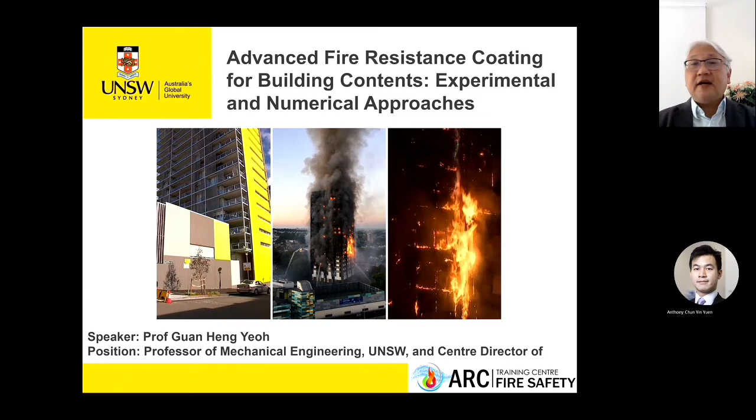My name is Professor Guan Heng Yeoh. I'm a professor of mechanical engineering at University of New South Wales, and I'm also the center director for the ARC Training Centre for Fire Safety. Today's presentation is to look at some of the work that we carry out in our training center, which is focused on developing advanced fire resistance coating for building contents.

Strictly speaking, we'll cover two main areas in this presentation: the development of a lightweight fire resistant coating, compared to some of the existing coatings that are around, and also some developments using advanced numerical approaches to characterize polymer degradation and chemical decompositions. Firstly, the development of lightweight fire resistant coating was actually inspired by work I carried out with my colleague, Dr. Anthony Yuen, where we were asked by Fire Rescue New South Wales firefighters to look at a case of an aged care facility fire, which resulted in 14 fatalities.

The reason why I mentioned casualties in the first place is because initially they were still alive when this incident happened, but a week after that, because of the toxic inhalation, they eventually passed away, which was a very sad occasion during the time.

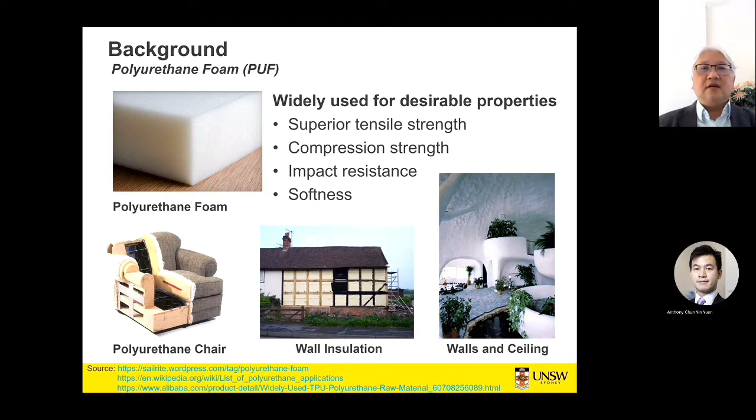So polyurethane foam is widely used in a lot of building settings, and it's typically found in all our houses. Why is it used? It's because there are a lot of desirable properties like superior tensile strength, compression strength, impact resistance, and also the softness that comes along with the material. As you can see, it is typically the material in chairs, wall insulation, and even walls and ceilings as well. But polyurethane foam has a lot of issues.

Basically, it's highly flammable, and it ignites at a very low temperature. You're talking about roughly between 180 degrees to 200 degrees here, it will ignite. So the risk is that if you have sufficient amounts of these materials present in your homes or office spaces, and if one of these materials burns, you could cause a rapid fire spread.

And because of the rapid fire spread, it could actually result in a lot of gases being emitted in the form of carbon monoxide. And we do know as well that polyurethane does emit hydrogen cyanide in some quantities as well. So the issue here is whether we can flame-proof this material, and one way to go about it is actually to introduce flame retardants into polyurethane foam.

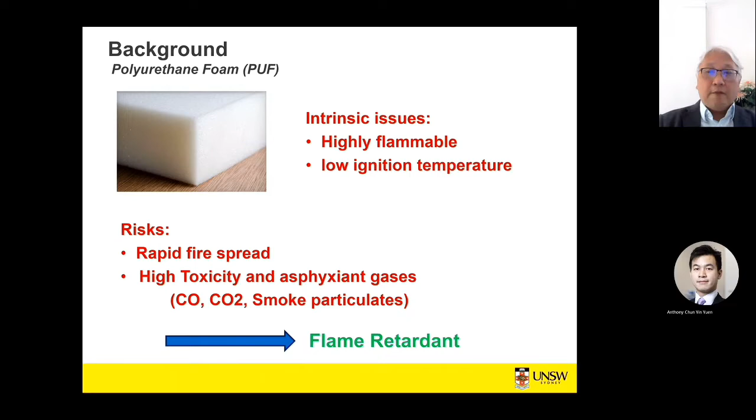And one of the benchmark fire tests to actually assess this flammability is the cone calorimeter. And I'll be revisiting the cone calorimeter a lot because it is a very suitable test to look at the time to ignition. You can actually assess the heat release rate, the total heat release rate, the smoke release, and even the gas releases as well.

And basically, we follow the Australian standard AS/NZS 3837 for testing heat and smoke release from materials. And we also assess a lot of our development, which is the coating of the foams, using the cone calorimeter. So let us look at some of the ways that people have tried to flame-proof polyurethanes.

So one of the ways is infusing phosphorus-containing polyol, a chemical compound which is very rich in phosphorus, into the polymer matrix. Some of the materials that have been infused with the polyol through the transesterification process are listed in the slide here. So the question beckons: how is the performance with the introduction of this phosphorus-containing polyol?

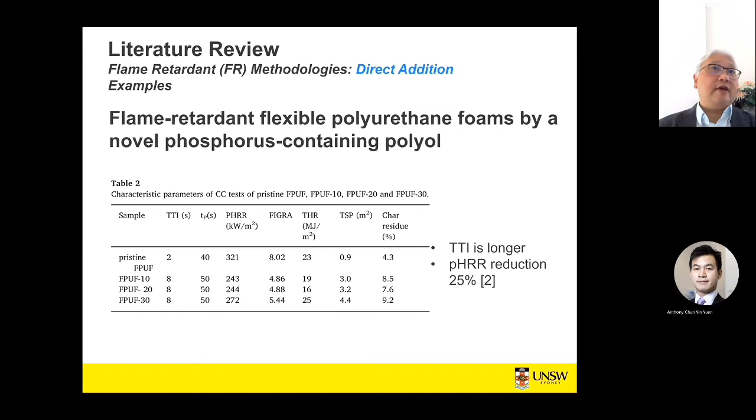As you can see, without the polyol itself, the peak heat release rate is 321. But with the addition of more and more phosphorus-containing polyol, the heat release rate reduces quite marginally to 243, 244, and 272. So you can see that in the peak heat release rate there's a 25% reduction, which gives us an indication that the introduction of phosphorus-based flame retardant could be a very effective way to flame-proof polyurethane.

There are others, introduction of other types of phosphorus-containing polyol like DOPO, which is very common, and it does give at least a 20% reduction in the peak heat release rate. Nevertheless, the fire safety performance remains not very significant, because with a 20% reduction the material will still burst into flames, and it's just a matter of retarding and not suppressing the flame spread that could happen.

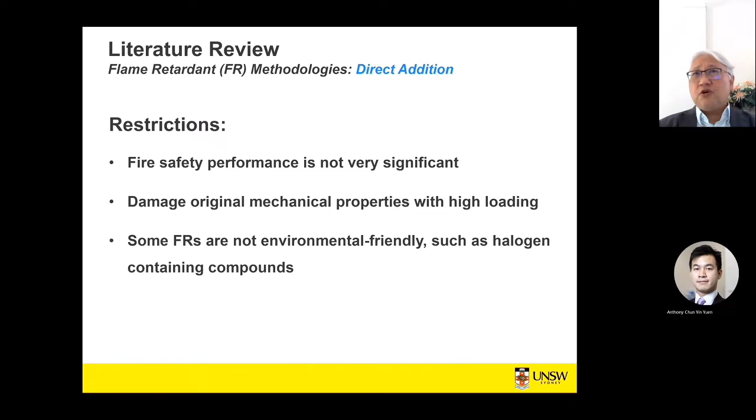And also, by infusing some of these flame retardants in the polymer matrix, the original content of the material is actually reduced. To give you an example, in a pristine polyurethane foam you have 100% of this material. If you take out 20% and replace it with 20% of the flame retardant, a lot of the mechanical properties are actually lost. And this is demonstrated by some of the testing that we have carried out. Also, some of these flame retardants being introduced are not environmentally friendly. For example, they contain a lot of halogen or even bromide-containing compounds as well.

So the question here is, could we introduce flame retardant with minimal influence on the polyurethane? The answer is, yes, we can. For example, we could take the original foam itself and apply a coating. And the coating can be realized either by spray, spin, sputtering, or chemical vapor deposition.

Another common approach that is also being introduced is the layering approach, which is called layer-by-layer assembly. So we basically try to apply multiple layers of different concentrations of flame retardants onto the polymer surface. So effectively, when we look at how we can carry out this layer-by-layer assembly, what happens here is that the original material or the substrate is polycation. So basically what we try to do is to activate the surface of the polymer so that it can attract the flame retardant compounds onto the surface.

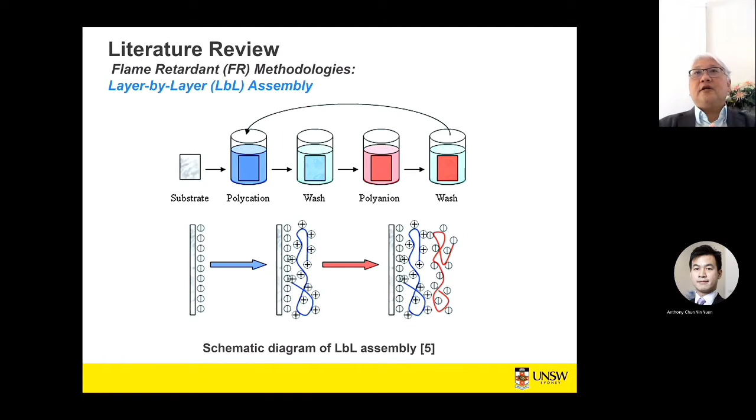And basically what is done here is that by introducing, for example, a negative ion onto the surface, you can now attract a lot of positive ions, flame retardants, and subsequently you can attract the negative ion, which all will be attracted to each other to form a very, very durable layer. So that's basically the whole principle of a layer-by-layer assembly.

It can also reduce the peak heat release rate and smoke release rate, but the disadvantage at the end is the significant weight gain due to this material. So a weight gain of 5, 7, or even 10% will incur significant additional weight to the polymer. So there is still quite a number of research gaps looking at flame resistant performances of fully organic flame retardants. The weight gain by incorporating these coatings is still a considerable factor.

There are still limited studies reporting the suppression of toxic gases such as carbon monoxide or even hydrogen cyanide, as I've alluded to in the beginning of my presentation. And the cone calorimetry experiment cannot represent the full burning of the material in a full room environment, for example, the flashover phenomena in a nursing home.

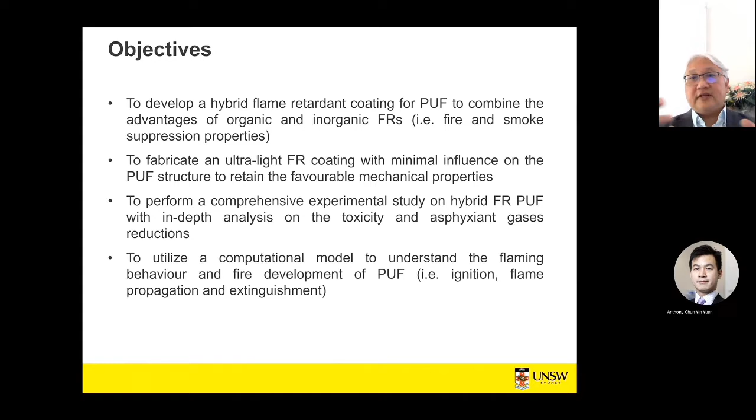So the material that we have discovered lately that could actually produce a lightweight fire resistant is MXene. So what is MXene? MXene is a new family of 2D transition metal carbides. It's always produced by the exfoliation of the MAX phase. The beauty of this material is that it has a thickness of around 1 to 2 nanometers, and it's a 2D sheet of roughly a couple of nanometers in size.

And what we have found is that MXene has a very superior fire retardant performance, and it also has other functionalities like good thermal and electrical conductance as well. So it's really a multifunctional material. And as we looked at what other organic compounds can be complementary to MXene, we found that we can use chitosan, which is basically an extract from prawn shell, and also other nano compounds, for example VMT, which is vermiculite, or even MMT, montmorillonite, as well.

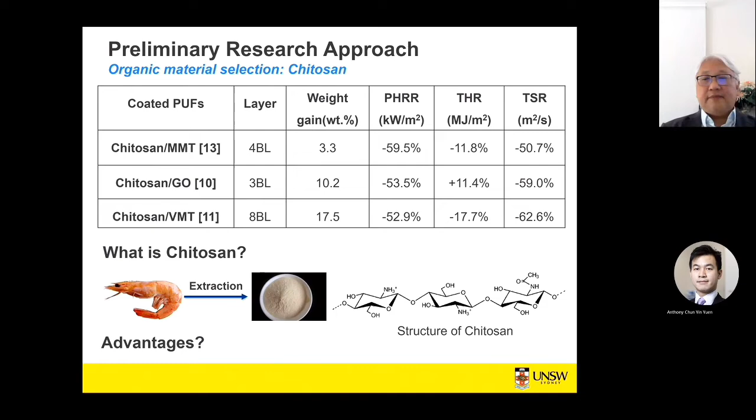So the MXene that we've chosen here, in its raw form, is a titanium aluminum carbide. Through immersing in acidic solutions, the aluminum sheets in between the titanium and carbide are etched out, and then it is exfoliated through liquid exfoliation, resulting in Ti3C2 nanosheets. And that is the 2D nanosheets that we will be using as a flame retardant in a layer-by-layer approach.

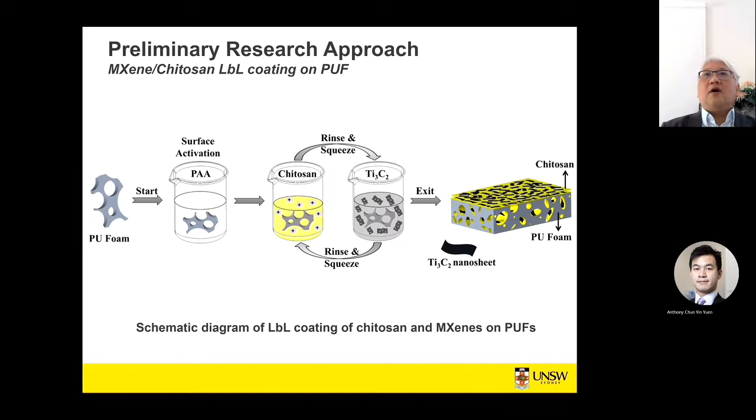And again, as I demonstrated with the layer-by-layer approach, we start with the foam, and then we surface activate using polyacrylic acid, to charge up the surface of the material. And then we do multiple layering between chitosan and Ti3C2, and at the end we cover this PU foam with chitosan and Ti3C2 with a number of layers.

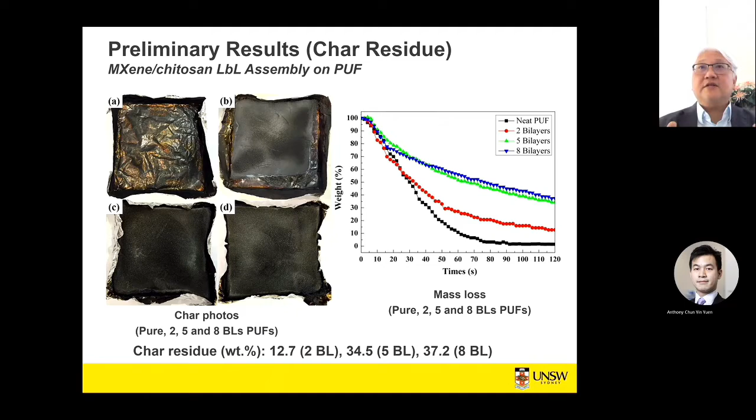And if you look at the mass loss itself, with the 8 bilayers it still retains at least 40% of the material remaining behind, while a foam without flame retardant basically burns all up by 90 seconds. And these are the references.

One thing that I've not shown here is the weight gain. The weight gain based on our coating is roughly around 2 to 3%. So a 2 to 3% lightweight coating that gives you a remarkable performance of 50 to 70% reduction in flammability is really a game changer, because now we can take almost any foam and layer it with this lightweight fire resistant coating to achieve the desirable flammability reduction or high fire safety performance.

And the next thing I'd like to look at is that a lot of what we have done is ad hoc, to try to achieve the macroscopic behaviors in terms of flame retardants. But we would now like to look at the intrinsic behavior, the internal behavior of why polymer degrades and what compounds it decomposes to as it burns. So we went down a really fundamental way, looking at the atomistic level, using molecular dynamics simulation.

So essentially, molecular dynamics looks at the molecules of the material. The whole point here is the tracking of molecules using Newton's second law with appropriate reaction forces, which is the force field. And by tracking each of these molecules, you can then look at the dissociation or breaking of bonds, and also the formation of new molecules.

And in order to do so, with polymers, an initial step is required, because in actual fact, the polymer is basically a chain of these linear molecules joining together. But to actually replicate the actual foam material, we need to carry out a compression annealing process so that it becomes an amorphous system that mimics the polymer matrix in the foam, okay? And this is done through applying a suitable temperature to carry out this process.

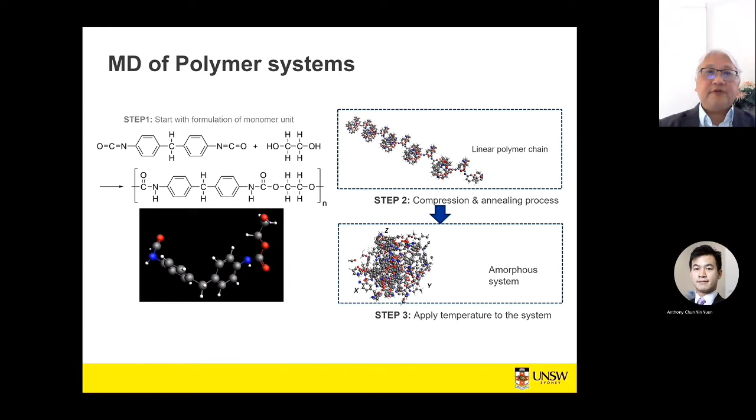And what we have done here is that we took another step to try to understand whether we could look at typical polymers, for example, high-density polyethylene, PMMA, or even high-impact polystyrene, and look at how they degrade when the material is subjected to a high temperature. So in order to do so, we took the amorphous system of these various polyethylene, polystyrene and PMMA. We subject it to a temperature that is close to the breaking of the bonds, which is roughly above 2000 K, right? And based on that, we can now see what other compounds it will form once the molecules break.

So this is basically trying to demonstrate the simulations across time. As you notice, we are looking at picoseconds, so basically talking about 10 to the minus 12 seconds, right? And we really track this development of the breaking of the bonds through time, until maybe nanoseconds or milliseconds, to see what other compounds it generated.

Based on this graph, which is looking at transient development, we could see that it could form compounds like methane, acetylene, methyl, basically all the compounds associated with the alkane groups, right? Which is interesting because the polymers are actually made from fossil fuels. And the fossil fuels have a richness of carbon and hydrogen atoms. And it is not surprising that these polymers do degrade when they burn to these compounds, as would be expected.

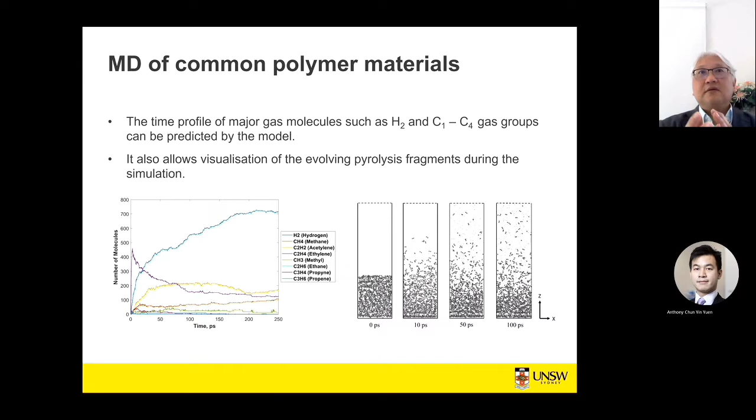But the complexity of the reaction actually precludes us from determining what is the actual compound that contributes to the combustion behavior. And the only way to do so is through these molecular dynamics simulations.

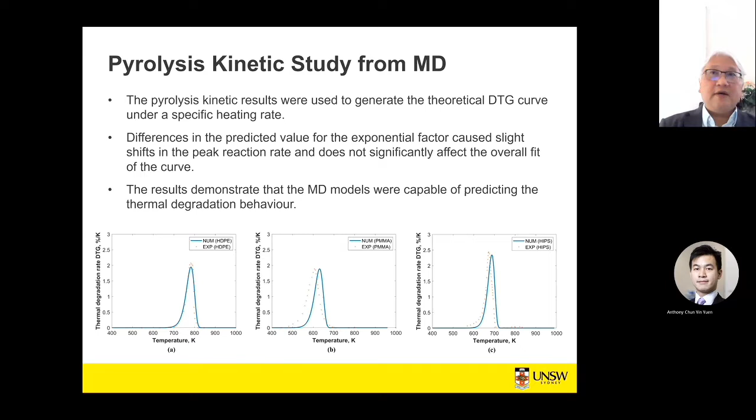So if you look at a comparison numerically in terms of its thermal degradation behavior based on the differential thermogravimetric behavior, you can see our prediction using MD comes very close with experiments as well. Now, these figures are significant because they give us confidence that we can use this kinetic rate to be fed into computational models, for example, CFD models and so forth. So what we have done here is that we have gone through a very fundamental route and we could derive useful data as input to the CFD model.

One of the good things that comes out from this work is that we can look even at the charring behavior of this material. So for example, by tracking the carbon 3+ molecules, we can look at the percentage of char mass fraction of these three materials. For example, high-density polyethylene has a char fraction of roughly 0.3%, which is comparable with experiment, as well as PMMA and high-impact polystyrene, which is close to 1%. So again, the richness of the data we obtained from molecular dynamics gives us a lot of insights into the polymer degradation behavior.

This slide here just shows you a breakdown of all the compounds that were derived from the MD simulation itself. What we can do from this data now is that we can use this as the fuel for the combustibility

of polymers. Because in actual fact, when you try to get things out from the cone calorimeter, the cone calorimeter is unable to get down to this fundamental level, to get the species that constitute the burning of polymer. Molecular dynamics offers you this avenue. And now we know what are the compounds that will contribute to the combustible, and we can feed all these compounds now into the CFD model.

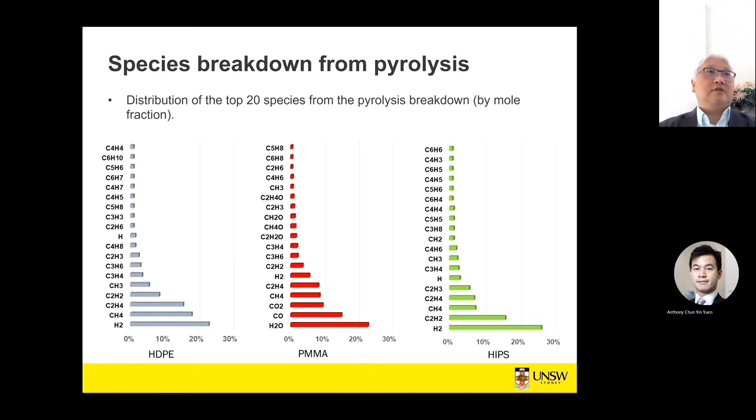So another thing that I'd like to present here is looking at characterization of flame retardant mechanism. So what we have done here is that we're using molecular dynamics now to look at the introduction of APP. As all of you know, APP, ammonium polyphosphate, is heavily used in a lot of flame retardants nowadays. It's one of the widely used flame retardants. So what we wanted to do is whether we could develop polymer composites containing APP.

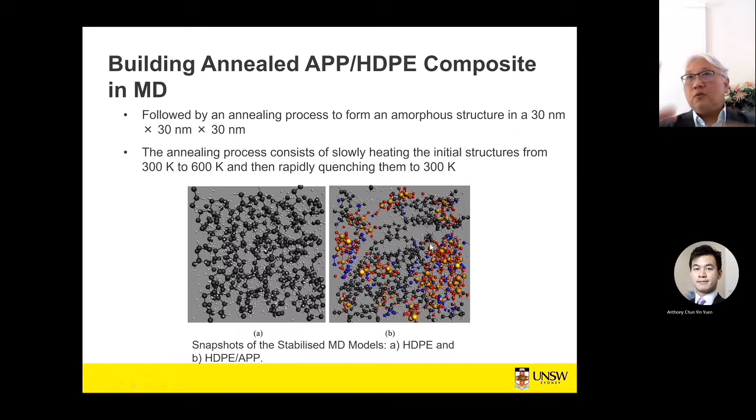Again, we follow the annealing process, and what we result at the end of the day is that if we combine it with HDPE, the APP will be filled within the polymer matrix, as shown by the right-hand figure there. And if we look at the flame retardant mechanism, the first thing that we notice is that the number of carbon atoms prevailing during the degradation process is much greater than the original HDPE.

That means it's promoting char in the material to suppress the degradation, to insulate the material from degrading more. And also, APP undergoes a dehydration process, which forms water vapor to even suppress the flammability, the combustion behavior as well. And this is how we could get insights into how APP can be an effective flame retardant for flame-proofing polymers.

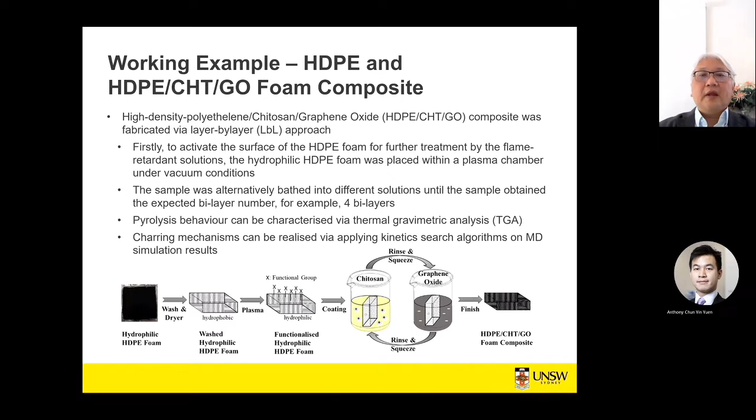Another work we have done is looking at how you link the molecular dynamics data to CFD models. In this work, we took the high-density polyethylene and we combined it, imagine like a layer-by-layer method, with chitosan and graphene oxide, as demonstrated by this figure here. And based on the high-density polyethylene, we compare with experimental data, and also experimental data with the combination of chitosan and graphene oxide.

And because we are trying to mimic a real-life experiment, we chose a cone calorimeter environment to demonstrate the flame retardancy of this material, HDPE. As you can see, based on the irradiation of 35 kilowatts per meter squared, which we carried out in a cone calorimeter experiment as well, the flame reduction is quite significant. At 180 seconds, the material is still remaining.

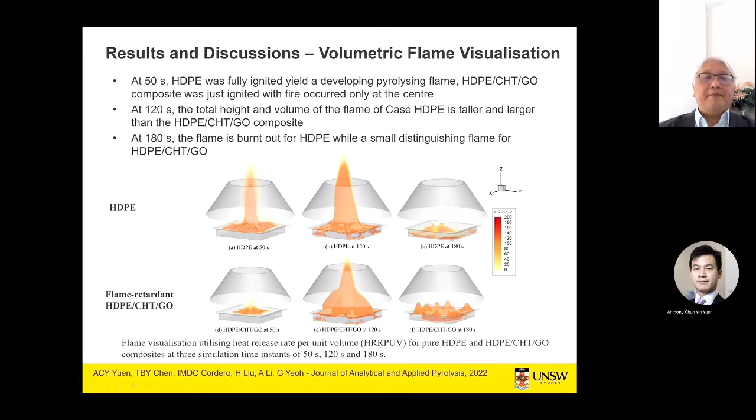So the concluding remarks that I'd like you to take away from this presentation are that synthetic materials create fire hazards mainly due to the high flammability of polymers. Secondly, we have managed to develop a novel 2D nanosheet material combined with organic compounds like chitosan that has resulted in remarkable fire resistance performance. And the good thing about this coating we have developed is that it is lightweight in nature.

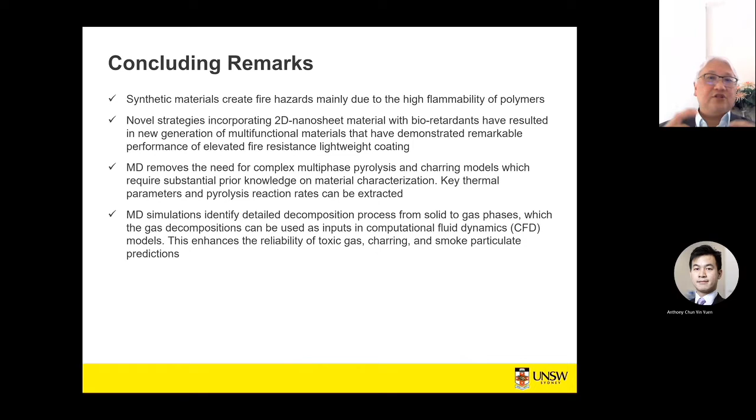And what we have done here also is that we have used MD to model or to better understand complex multi-phase pyrolysis and charring behaviors. And also what we have done here is that we have actually used MD simulations to identify the detailed decomposition behavior and use that as inputs, for example, the kinetics to the CFD model. This then gives us the richness of predictions of toxic gas, charring, and smoke particulate predictions.

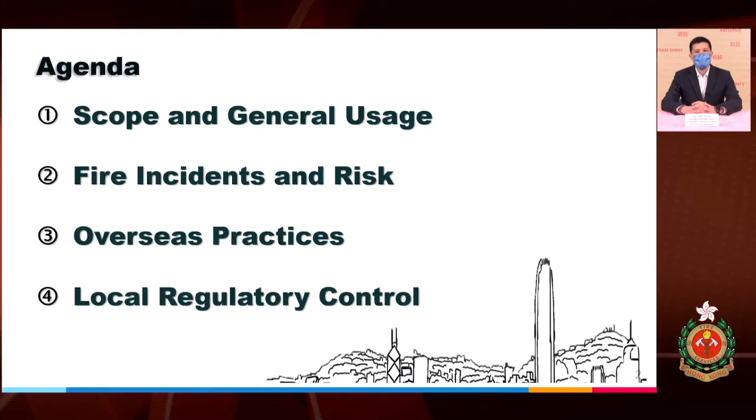Fire safety in buildings is determined by a number of factors: the provision of means of escape in case of fire, the ability of the building to resist the effect of fire and to minimize the spread of fire and smoke, and the provision of means of access to enable firefighters to effect firefighting and rescue operations. I'm sure Ms. Tam of the Buildings Department will give you a full presentation this afternoon. The Fire Services Department, apart from providing the frontline firefighting and rescue operation, governs the provision of fire service installations and equipment in buildings and the maintenance of them. Now we start my sharing.

In Hong Kong, the Buildings Ordinance, amongst others, governs the safety standards of the materials used in building works. On the other hand, BD also issued the Code of Practice for Fire Safety in Buildings. This code provides guidance on compliance with the requirements laid down in the Building (Construction) Regulations and the Building (Planning) Regulations, which include the requirements for fire-resisting construction, means of escape, and means of access for firefighting and rescue to the buildings. In addition, it also provides guidelines on the testing standards for the fire properties of building elements and components, fire safety management of buildings, as well as the alternative approach in fire safety design.

As those publications fall under the purview of the Buildings Department, I'm not focusing on those parts today. Instead, as a regulator as well as firefighters, I would like to share with you our approach on controlling the combustible material in buildings, for example, wall lining, furniture, and carpet, especially in licensed premises, say restaurants. In the past, there were several tragic fires involving combustible material that caused serious injuries and property damage.

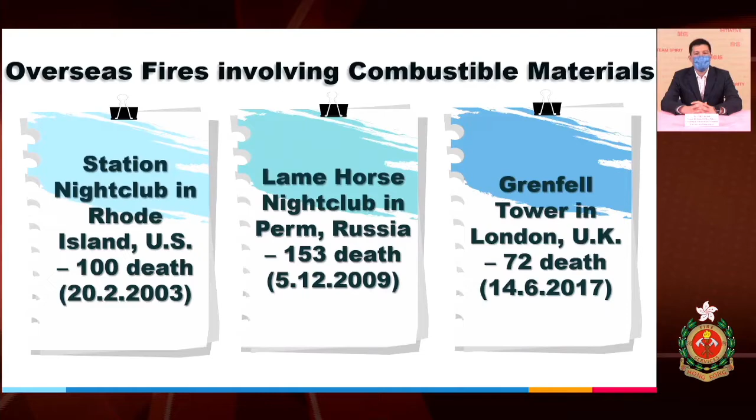This was due to the building's cladding and external insulation, since the air gap between them enabled the stack effect. The fire burned for about 60 hours before finally being extinguished. The fire demonstrated the high risk posed by the use of combustible materials, both internally and externally.

The Rhode Island fire triggered an immediate effort to strengthen fire code protections. The Life Safety Code was subsequently amended, requiring the provision of automatic fire sprinklers in nightclubs and similar locations that accommodate more than 100 occupants, and all new locations in the same category, and an additional exit requirement for new nightclub occupancies.

In the aftermath of the Perm fire, the local authorities stepped up enforcement actions on violations of fire safety rules. For the Grenfell Tower fire, the Phase 1 inquiry report was released in 2019. The presence of aluminum composite material rainscreen panels acted as a source of fuel, making the flames spread so rapidly to other parts of the building, and the loss of compartmentation. The fire on the outside quickly entered the flats.

The Phase 2 inquiry is still underway to hear evidence which examines the role of the government in establishing the legislative regime for the fire safety testing and classification of construction products and systems, and formulating guidelines on how to comply with it.

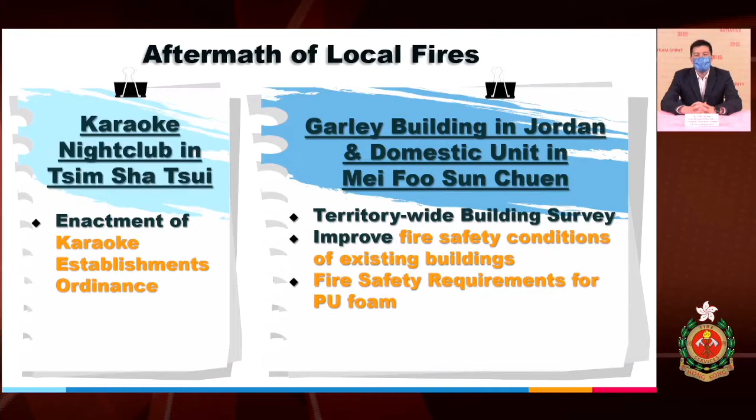We are all very aware of the fire risks posed by the combustible materials, especially for premises that attract a large influx of people. Fire quickly spreads along the wall and ceiling line to other parts of the buildings. On the other hand, toxic gases will be released during combustion, causing people to suffocate and lose consciousness, or even death.

In the following slide, I will briefly introduce the regulatory regime on the building combustible materials. The use of combustible material in buildings is regulated by the local ordinance, regulations, and codes. In US, the Life Safety Code provides the flammability standard for interior finishes that will be tested in accordance with NFPA 286.

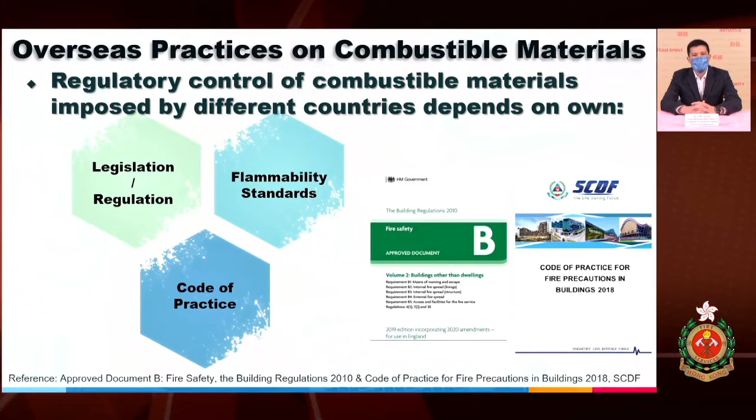In UK, the internal linings are regulated by the Building Regulations 2010, in which they shall meet the relevant fire performance classifications as stipulated in Approved Document B. In Singapore, the Code of Practice for Fire Precautions in Buildings 2018 stipulated that finishes shall not contain any plastic materials unless they meet the relevant flammability standard for the flame spread and smoke density.

In Hong Kong, as introduced in the very beginning, there are mainly two regulatory regimes, one for the use of combustible materials in new buildings, and one for licensed or registered premises. When a new building is constructed, the authorized persons of the project certify the building materials, including the lining works, have fulfilled the relevant flammability standards.

We ensure all linings for acoustic and thermal insulation purpose in ducting and concealed locations, and all linings for acoustic, thermal insulation and decorative purpose within the means of escape shall be of Class 1 or 2 rate of surface spread of flame as per BS 476 Part 7 or its international equivalent, or be brought up to that standard by the use of an approved fire retardant product. Before arranging the acceptance inspection, the AP will certify and serve a confirmation letter to FSD for verification.

On the other hand, some premises may be later used as licensed or registered premises, for example, restaurants, karaoke, kindergarten school, etc. Such use will certainly attract a large number of persons to stay for long periods of time. From fire safety point of view, FSD may, subject to the result of on-site assessment during the processing of licensing or registration applications, impose additional fire safety requirements to reduce the fire risk posed to these premises.

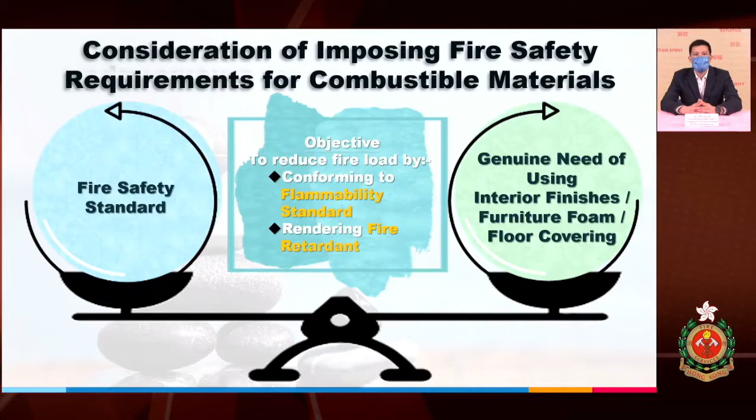Therefore, we adopted a flexible and pragmatic approach in formulating the requirements. These combustible materials shall meet specific flammability standards, or achieve fire safety standards by applying fire retardant spray. Fire risk in the licensed or registered premises generally refers to the following factors. For the fire load, restaurant owners will often install wall lining or false ceilings for decoration purposes. Tutorial centers will also install partitions to separate rooms for conducting classes. Undoubtedly, the installation of such will increase the overall fire load inside the premises.

Most restaurant fires originate from the kitchens, with the naked flame cooking process. NFPA previously conducted a survey on structural fires in eating and drinking establishments. The report revealed that cooking equipment was the leading cause of fire in these premises, accounting for 61% of fires and 38% of direct property damage. Other factors include electrical equipment, heating equipment, and smoking materials. In processing license applications, we consider the business nature of the restaurant or club, as well as the type of fuel used in such premises.

When processing license applications, we must be satisfied that the subject premises are not exposed to any undue risk of fire or cause any potential hazard to other occupancies in the same building. Our officers will, among others, take into consideration the compatibility of the proposed licensed premises with adjacent occupancies and the potential hazards posed by the proposed licensed premises to adjacent occupancies. All other contributing factors should also be considered, including the provision of fire service installations installed or to be installed, and direct or indirect communication between them. Consideration would also be given to any remedial measures or provisions which may be effected to overcome the problem.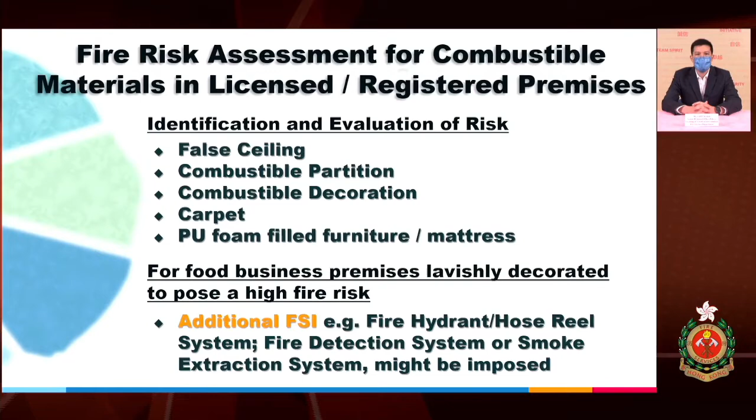Generally speaking, combustible materials used as false ceiling, partition, or wall furnishing in licensed or registered premises are required to meet the requirements of BS 476, Part 7. We also accept other equivalent international standards. The license applicants may also achieve compliance by treating the combustible material with a fire retardant paint or solution acceptable to DFS. In the case of carpet, this shall comply with BS 5287. All foam-filled furniture and mattresses shall comply with BS 7176 and BS 7177 respectively, or Technical Bulletin 133 and 129 issued by the California Department of Consumer Affairs, Bureau of Home Furnishings and Thermal Insulation. The license applicants are required to produce the relevant certificates to the FSD during a compliance inspection to prove that the combustible material meets the relevant standards.

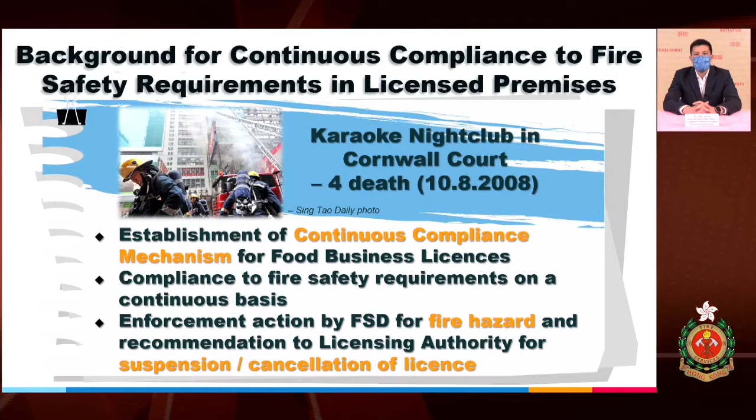Under the measures, if FSD finds that there is a fire hazard arising from a breach of fire safety requirements in the food premises that would render the premises unsafe for business operation, FSD will take appropriate enforcement actions under our ambit and recommend to the licensing authority to suspend the license immediately. The food premises shall suspend operation under the law until the fire hazard is abated. If the premises fails to abate the fire hazard, the food premises license is subject to cancellation by the licensing authority as well. From a fire safety point of view, the addition or alteration of combustible material for false ceilings, combustible partitions, decorations or PU foam-filled furniture in licensed or registered premises may increase the fire risk.

Therefore, FSD requires the responsible persons of the licensed or registered premises to submit a test report or a certificate to verify if the newly installed or altered combustible material meets the specific flammability standards. The measure is to ensure that the combustible materials continuously comply with the required flammability standard so that the fire safety standard in those premises can be maintained.

In order to raise the concern of the licensed or registered premises on the use of combustible materials, FSD also issues circular letters and advisory letters to remind the responsible persons to safely use the combustible materials and comply with the required arrangements. In prescriptive-based approaches, fire safety in buildings is provided using a combination of active and passive fire protection systems.

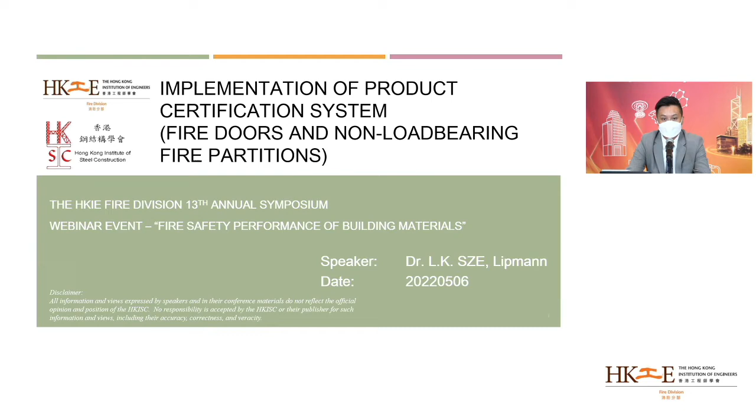In this presentation, it will mainly be divided into two parts. The first one is Section 1, the introduction of the Product Conformity Certification Scheme, which we also call PCCS. Section 2 is a case study on how to conduct an audit on the timber door set, the fire door set.

So Section 1 is just a brief introduction of the Product Conformity Certification Scheme. In this slide, there's a photo showing the cover page of the Product Certification Scheme. If you are in this industry, normally you will have a chance to be in touch with some kind of product certification scheme, for example, for fire doors or for any other construction products. Normally they will have a product certification scheme.

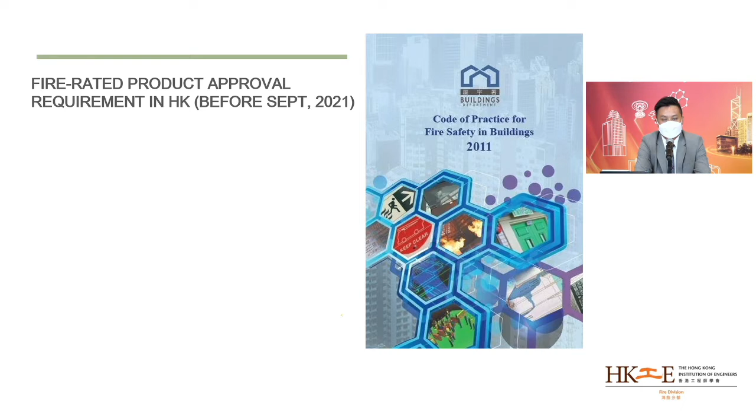Before we talk about the product certification scheme, we will first introduce the current practice of how the approval authority can approve the fire door. In the current practice, if you are in this industry, you have to look at the Code of Practice for Fire Safety in Buildings 2011. This code of practice is a guideline for the construction of buildings in Hong Kong, issued in 2011.

At that time, the product approval section, according to Section E16.1, mentioned that the BA, the Building Authority, will recognize HOKLAS accredited laboratories issuing test reports and assessment reports, so the Buildings Department will only accept reports issued by an accredited laboratory. If the test report is not able to fully represent the products that will be used, there will be an assessment report based on the results of a test report, so that some minor modification is allowed.

Combining the test report and the assessment report, the application of the fire timber door set can be established. At the time, only the test report and the assessment report were submitted, showing the fire rating performance of the products only.

With only a test report and assessment report, usually the manufacturer or product supplier will submit the product sample to the accredited laboratory for testing. As soon as their products arrive, the laboratory will have to verify the construction of the submitted products. That means they will check the construction of the timber door set, or the lab may go to the factory to check the internal construction of the door set if necessary.

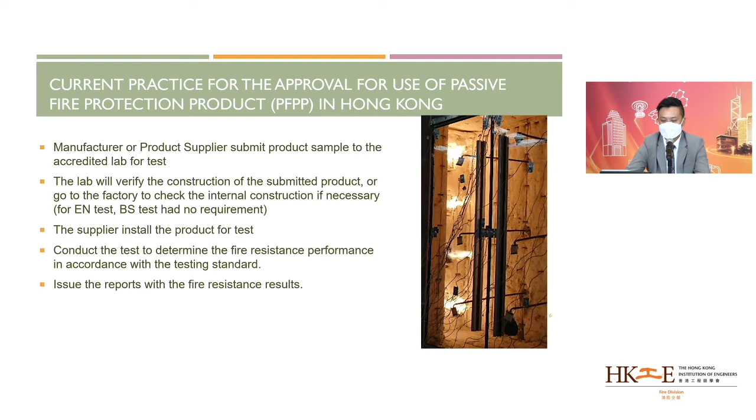After the test, the laboratory will issue the fire resistance test report to show whether the door can fulfill or satisfy the duration of the fire resistance. But you have to know that the test report actually just tells the result of the test, that is, how many minutes of integrity or how many minutes of insulation the door set achieved. In the test report there will also be a full description of the construction of the door set and the product drawings. So the test report actually has quite a thorough description of the door set and how it performed under the test.

However, in the test report, there is one main concern that has not been mentioned, which is the quality. For products that can be used in the market by the user, the quality of the product is more important, or I should say, it is of equivalent importance as the performance of the products.

The quality of the product is not only the end performance, but also shows how the products are made: whether all the manufacturing follows a well-defined procedure, the use of the same material and the same batch or blending, whether the workers are well trained, and whether there is proper quality control in the manufacturing process. All these key issues will affect the quality of the product. However, if we only have a test report or an assessment report, we are not able to assess the quality, because quality is more likely assessed during the manufacturing rather than just the fire test.

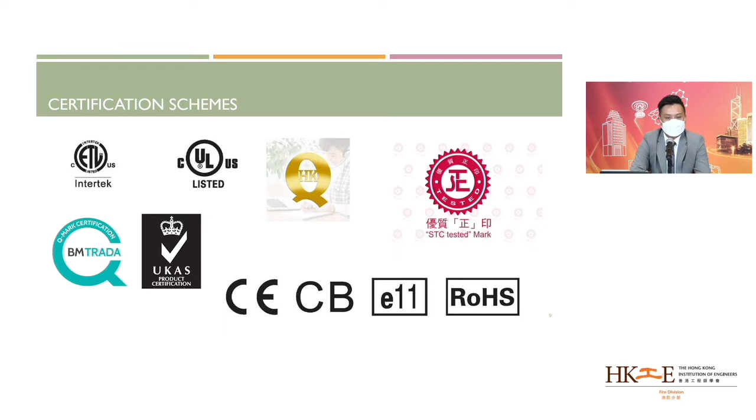So how can we assure the quality of the product? In previous practice, if we just had a test report or an assessment report for approval purposes, sometimes it created problems: when the doors were manufactured, the quality may not be as good as when the door was manufactured for the test. If the manufacturing process has errors or tolerances over the limit, the door sets manufactured may not be as good as the test product. Sometimes you may see news about fire-rated products: if the manufactured products are not of the same quality as the tested ones and are already installed in the building, it may cause problems.

And also, if only the test report is valid in the market, sometimes there may be an issue that some other manufacturer, if they get the reports, claim that they are actually manufacturing door sets according to the construction that's shown in the test report. In the current practice, it seems that it is still valid in the market, so it can still be used. However, if the manufacturing site, the manufacturing procedure or the workers that manufacture the door sets are other parties, to our sense, it is actually a totally different story.

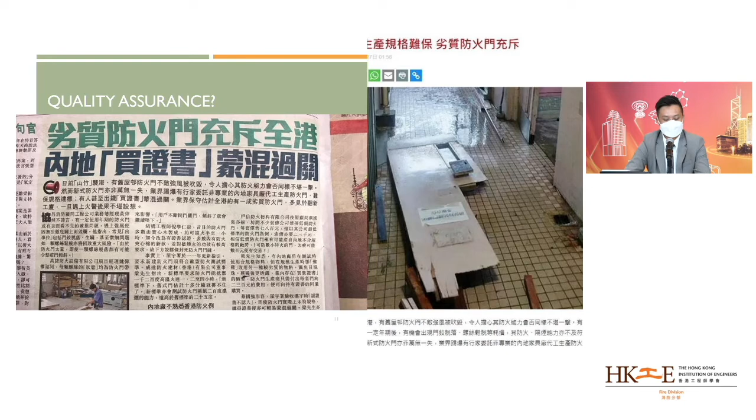So in order to tackle this, the BD, in September 2021, already issued a PNAP, which is APP 165. This APP 165 is the PNAP related to the product certification scheme. In this new APP 165, it mentions that the BA will also accept a valid COC, which is the certificate of conformity, issued by an HKCAS accredited CB. HKCAS refers to the Hong Kong Certification Body Accreditation Scheme.

The accredited CB is a certification body, as an alternative to the test or assessment report prepared by the HOKLAS lab. So with this letter issued, it provides one more approach for the product approval, which is the COC issued by the CB. This letter does not actually phase out the old practice, but it provides one more solution for the product approval. If the COC is valid, there is no need to submit the test and assessment reports.

And also, for the current status, the product certification scheme will only apply to fire-rated doors and non-load-bearing partitions only. However, we will keep updating the product certification scheme so that it can include more and more fire-rated products.

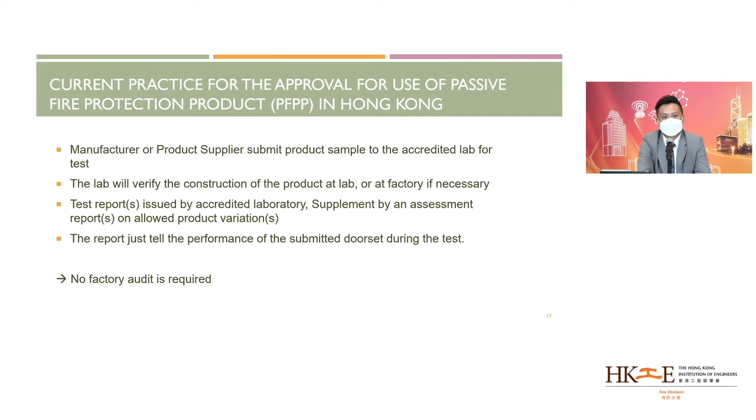So in a short summary, for the current practice for the approval for the use of PFPP in Hong Kong, PFPP means passive fire protection products, which usually refer to some kind of fire door, fire-rated wall or fire-rated ceiling. Those are passive construction products, so they will not actively suppress fire, like the sprinkler. So we call it a passive fire protection product, PFPP.

For the manufacturer or the product supplier, in current practice, they will just submit the product sample to an accredited laboratory for testing. The lab will verify the construction of the product at the lab or at the factory if necessary, and based on the test result, issue the test report. And also, the application of the door sets will be supplemented by an assessment report on allowed product variations.

However, the reports actually just tell the performance of the submitted door during the test. They make no mention of how this door is made, or how the manufacturing process of the door sets is implemented. So in the current practice, no factory audit is required, there is no requirement for the manufacturer to implement any QMS, the quality management system, and there is no guarantee about the product's quality during mass production.

So I've talked quite a long time about the product certification scheme. So what is a product certification scheme? The purpose of the product certification scheme is to ensure that the products in the market and those submitted to the test are identical, manufactured according to the claimed manufacturing procedure, and match the stated performance, with periodic monitoring by a third-party certification body, the CB. It is important that the monitoring is carried out by a third party, not by the manufacturer themselves. The products are manufactured at a constant quality level as claimed.

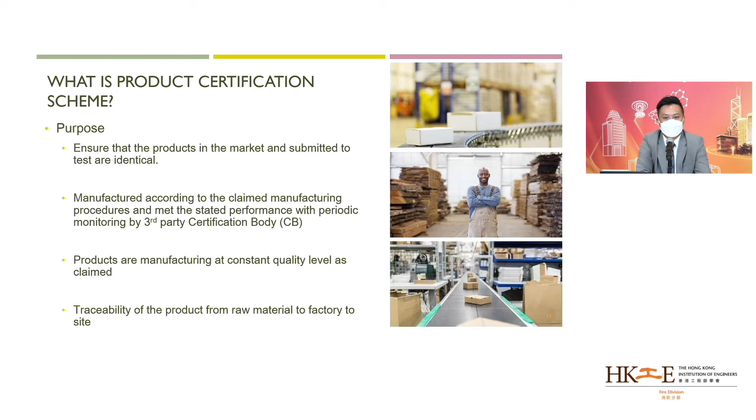And one more important concern is the traceability of the product, from the raw material to the factory to the market. If the product is sold in the market and the user finds the product has some problem, we usually have to find out what the problem actually is. With this traceability link, we can trace the product back from the market to the factory, to the raw material, and to the manufacturing procedure, so we can assess in which link the products actually had some problem during manufacturing.

So how can this be achieved? In order to achieve a product certification scheme, usually the factory or the manufacturing site has to implement a quality management system, the QMS. QMS may be a term that you may not be familiar with. However, the QMS is actually some kind of scheme like ISO 9000, which is the quality scheme. The QMS will include the administration and also the manufacturing.

It is because usually if we are talking about the QMS, most people will just have an idea that it is related to some kind of administration process. For example, the document control, how to demonstrate that all the records are well written, something like that. However, in the product certification scheme, usually the QMS has to include the manufacturing as well. That means that the manufacturing procedure should also be quality controlled.

All the key procedures in the manufacturing will be well documented, and also labeling on every unit of delivered product. That means that when the product is actually flowing in the manufacturing process, at each stage it has to be well defined and labeled, in order to avoid misleading. And also there will be a periodic audit by the CB, the certification body.

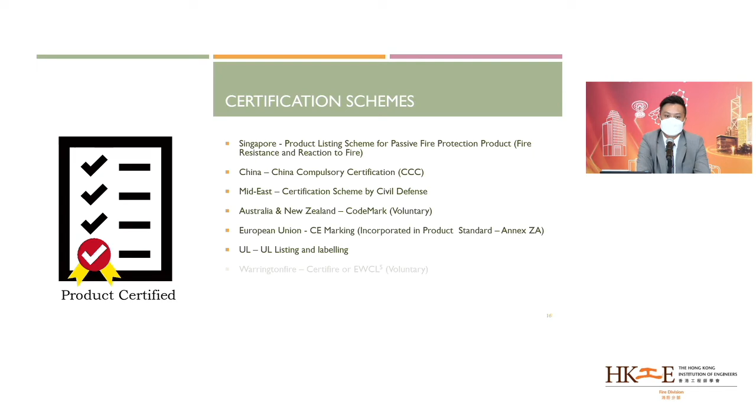Product certification schemes have already been well established all over the world. For example, in the Asia region close to us, Singapore already has its product listing scheme for the PFPP. And in China, we have the China Compulsory Certification, which we also call the 3C certification. The Middle East has a certification scheme by the Civil Defense.

And in Australia and New Zealand, they have the so-called CodeMark certification, which is a voluntary process. That means that the certification scheme is actually voluntary. The manufacturer can do it themselves, but it's not required by the regulation. And in the European Union, there is the CE marking, which I think most of us are quite familiar with now. And also some global markings, for example, the UL listing and label.

In the UK, there's Warrington Fire, which is the Certifire, or the EWCL. And also in the UK, BRE Global Limited has their own LPCB certification scheme. And in Hong Kong, we have the PCCS PFPP. This scheme is voluntary at this stage, and it has already been adopted by the Housing Authority for quite a long time. So for all the products submitted for use in Housing Authority projects, they have to satisfy the PCCS PFPP requirement.

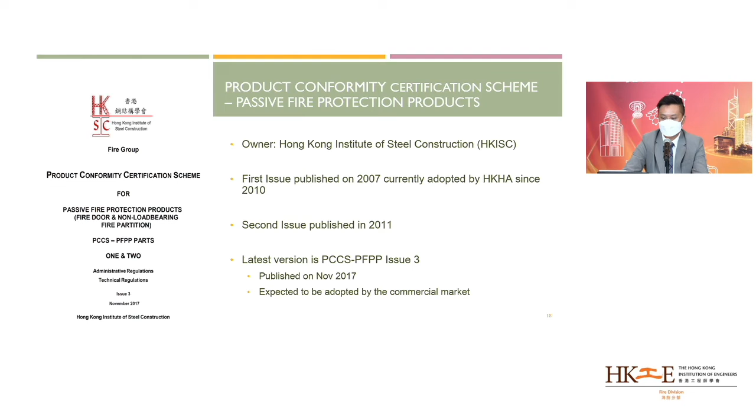In the product certification scheme, the parties involved include the certification body, the CB, which is an independent third party in charge of the certification process. In this CB, there will be some auditors or technical experts assigned by the CB to help carry out the audit. The second party is the manufacturer or supplier of the PFPP, who wishes their product to be certified.

And there's another party, which is the testing laboratory. The testing laboratory is the party responsible for carrying out the performance tests on the products.

And currently, issue 3 is now adopted by the Hong Kong Buildings Department as well, which issued the APP 165 in September 2021. The latest version of the PCCS only applies to the fire door and the lightweight partition system, but it will extend to other PFPP in the coming future.

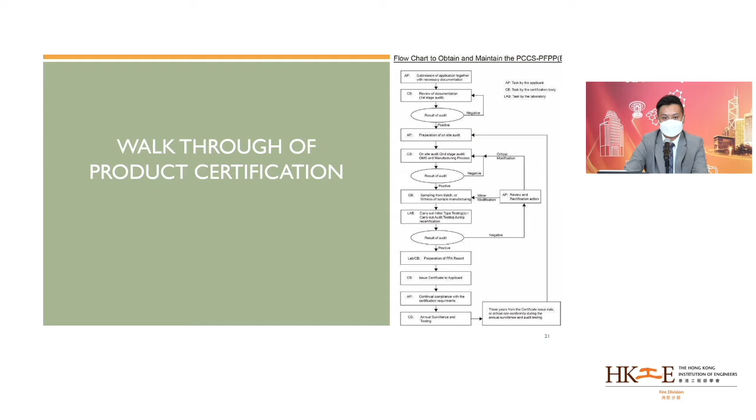So a walkthrough of the PCCS PFPP: this is just a flow of how the PCCS can be applied, so as long as you get the document on the website, you can have a look at it.

So for the manufacturing of the timber door set, when we are doing the audit, we are not only assessing the end product. We have to assess the whole manufacturing process, including the raw material selection and the raw material purchase. So we have to check whether all the raw materials have been well labeled in each stage.

And also, whether they have any tools they use to check the quality of the products during every manufacturing process. For example, dimensional check equipment, and also moisture content checking. Because for timber doors, the moisture content is one of the key concerns that may affect the fire resistance performance of the door. And also we have to check whether all the equipment they use is well calibrated.

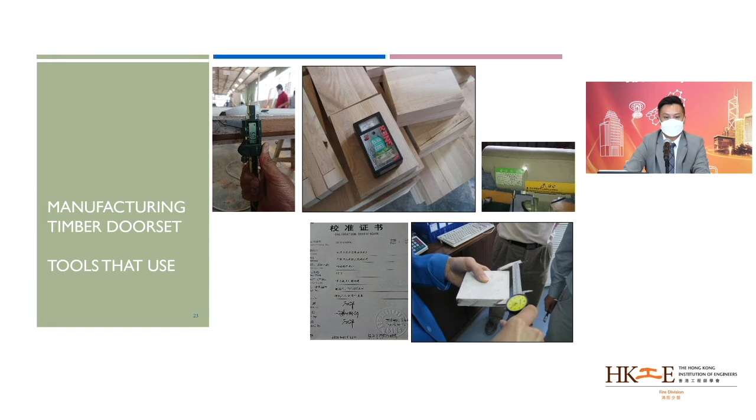In the manufacturing process of the PFPP, in the technical procedure there are some procedures that may be quite factory specific, because in manufacturing you may see some minor issues, for example, the board joint, where every factory will have their own practice.

For example, the photo in the top left corner shows a board joint which has a staggered joint. So as long as this staggered joint has been used in the tested product, then it has usually also been used in mass production as well. So the audit is to make sure that all the manufacturing process is according to the tested product.

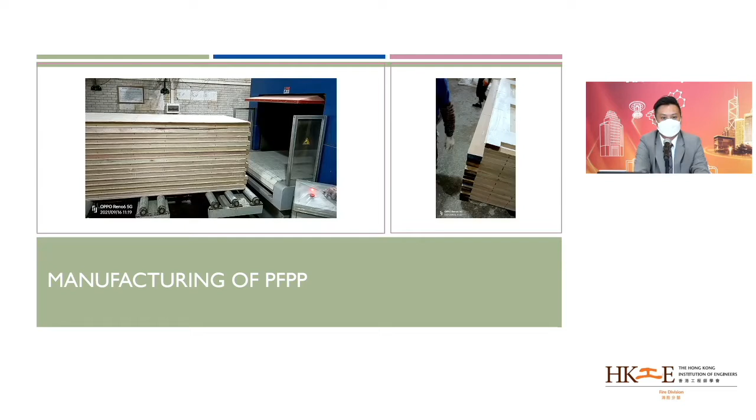So this slide shows some videos representing the manufacturing process of the door set. For example, the use of the adhesive on the door set to adhere the door facing, something like that.

And there's another video showing a door set now moving to the pressing machine, so after the door facing has been adhered, they have to press with a constant pressure for a duration to make sure that the adhesion of the facing to the door core reaches a certain limit or satisfies certain criteria.

So during the audit, we may have some destructive tests to check the end product. That means that although it is the end product at this stage, we still have to do some destructive testing on the door set to verify whether the quality at this stage satisfies the criteria set out by the factory.

And apart from the equipment, we also have to check some records, like the training records, and also the competence of the workers, that they are competent to perform the manufacturing process at that time.

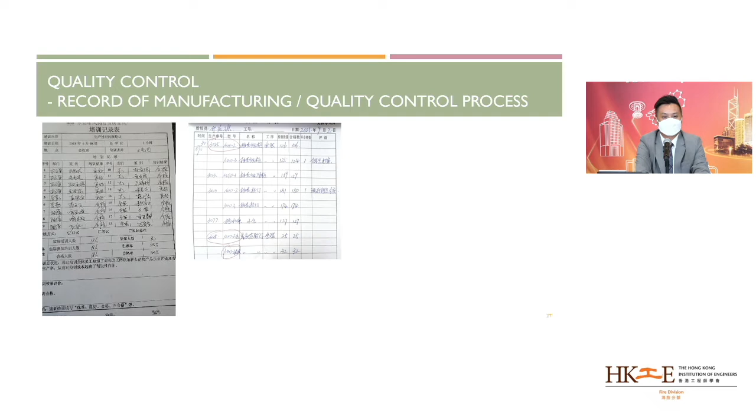And apart from the manufacturing process, the packing of the end product and the labeling of the delivered product is also very important. Because once door sets have been prepared at the manufacturing site, they have to be well packed, and each parcel has to have a very clear label showing that it is a fire-rated product, which site it goes to, and also a unique number on each door set.

It is important that it is for each door set, not for every parcel. It is for each door set. They have a well-defined label so that each door can be traced back from the site to the factory, to the user, and to the raw material.

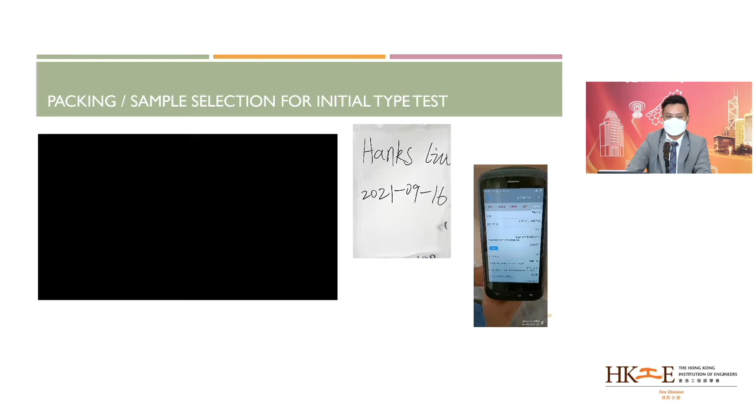So the marking of the label should include the following: the brand name, the manufacturing mark, the rating, the details of the size, and the address of the manufacturer. And after all the labeling has been checked, the CB will have to select the product for the initial type test. The door is selected by the CB, not submitted by the manufacturer themselves.

For the initial type test, actually, the door will be selected by the CB, and then it will be submitted to the fire test lab, and then the procedure will be the same as the previous one, which is to conduct the test and then issue the test report.

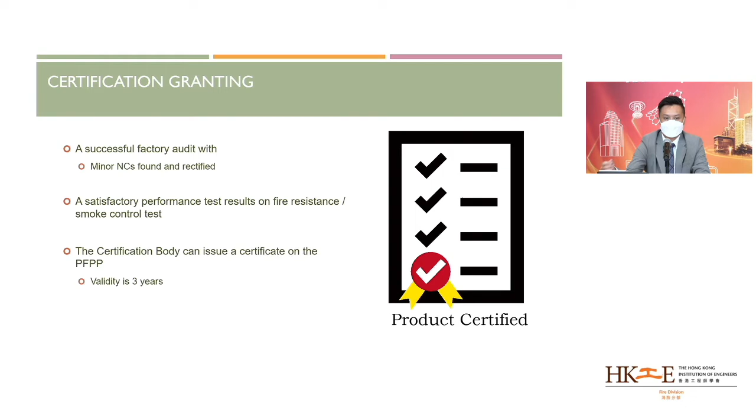After a successful factory audit, if there's no NC or some kind of minor NC, then they will have to do the rectification. And with satisfactory performance, the certification can be issued by the CB to certify the product. Usually, the certification scheme will be a 3-year cycle, and every year they have to conduct the annual surveillance, and every 3 years after that, it will be a recertification.

The purpose of the certification is to have the products certified, and then they can submit for approval in the market.

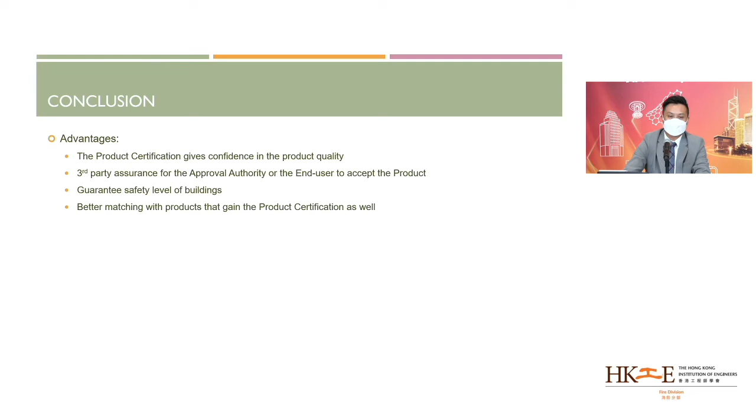So in conclusion, the product certification scheme helps to gain the confidence of users to use the product, and it also helps the manufacturer to keep cost control and to have a good allocation of resources. There are some disadvantages. Maybe the design variation is limited, or the product has to be more expensive. These are some of the disadvantages.

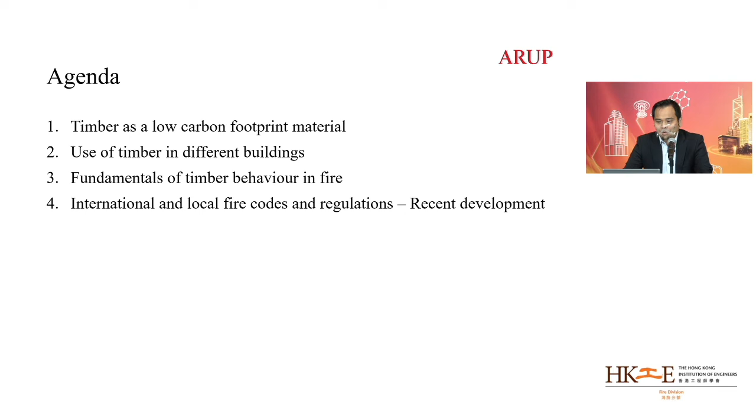So my agenda, I have 4 items to share today. First of all, I want to talk about timber as a low carbon footprint material and how timber is used in different types of buildings and different uses. And I'll go into the fundamental timber behavior in fire. And then finally, I'll share some international and local fire code regulation updates in recent years that make timber more popular or more usable in buildings.

So why timber? We all know that climate change is a massive issue. Based on the current practice, if we do nothing about limiting carbon emission, experts in the world have predicted that our temperature will increase by around 3 degrees by the end of this century. 3 degrees is going to be a disaster, and there are many documentaries talking about how bad 3 degrees will be. It's almost the end of the world.

In fact, we are already seeing some impact of global warming or extreme climate. Recently we have experienced the hottest winter and probably the warmest summer in Hong Kong. So if all national governments meet their targets of net zero emission by 2050, global warming could be limited to as low as 2.1 degrees by the end of this century.

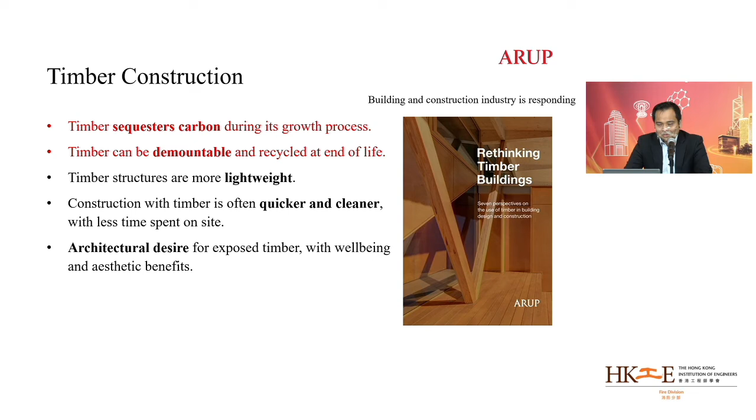And the next example is the Ping Shan Tin Shui Wai Cultural and Recreational Complex, again in Hong Kong. You can see that timber is used as part of the external cladding, screen, floor, and ceiling materials. So in Hong Kong, timber is not unusual, especially for internal decoration and finishes.

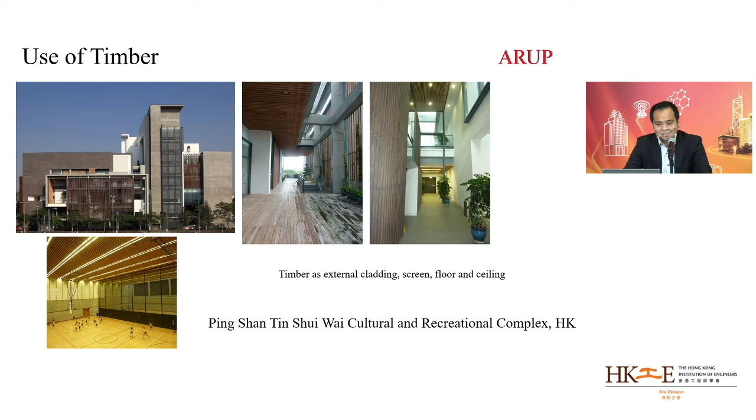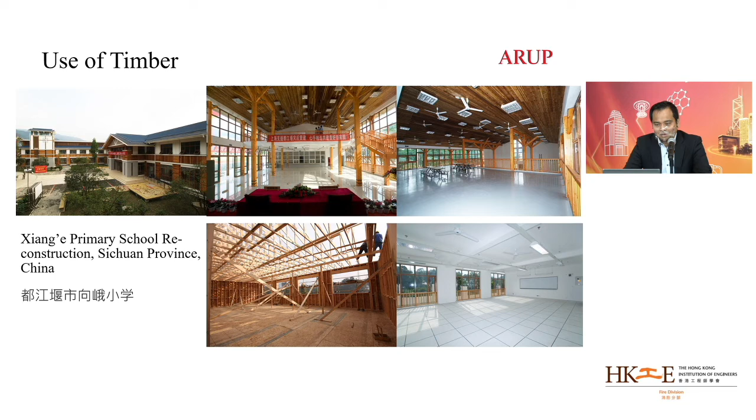So cross-laminated timber is an engineered composite product that consists of multiple layers of boards adhered perpendicularly to each other to achieve strength in multiple directions. It can be manufactured curved or straight, and is generally available in panel sizes up to 18 meters in length and up to 3 meters in height.

One of the primary advantages of CLT is the use of off-site fabrication, and CLT panels are most commonly used for load-bearing walls and floors. Whereas glulam is an engineered composite product that consists of smaller pieces of stress-graded wood that are adhered or laminated together. Glulam is actually stronger than solid wood, and glulam sections can be manufactured curved or straight, and are commonly available in lengths up to 20 meters. So you can imagine that when you use glulam, they can be placed in large spans and big

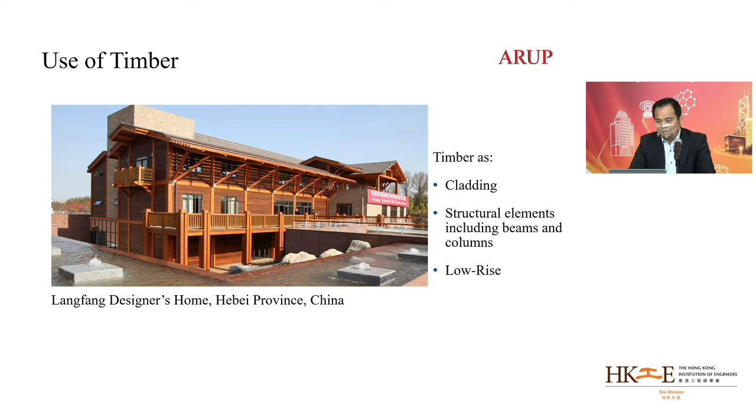So I'm going to show some examples of bigger buildings. This is another project in China, the Langfang Designers Home in Hebei province. Basically, the timber has been used for cladding and for structural elements. It's a two-story building with one basement, total floor area of about 2,500 square meters. Its timber beams and columns are designed with charring to achieve a 1-hour fire resistance rating. Both the internal and external load-bearing walls are protected by plasterboard as fire protection.

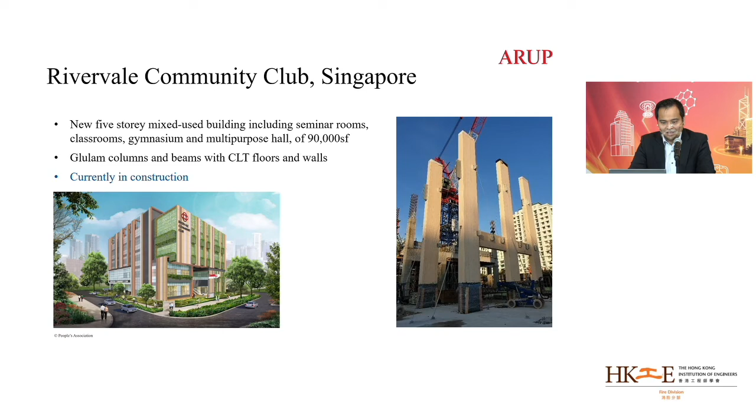So for the next one, I'm going to go outside China, Hong Kong, and the Philippines. Even in Singapore, timber has been quite a focus. This project is the Rivervale Community Club in Singapore. It's currently in construction. It's a new 5-story mixed-use building, which includes seminar rooms, classrooms, a gymnasium, and a multi-purpose hall, 90,000 square feet. It used glulam columns and beams with CLT floors and walls. So you can see glulam and CLT are very popular modern construction materials for timber.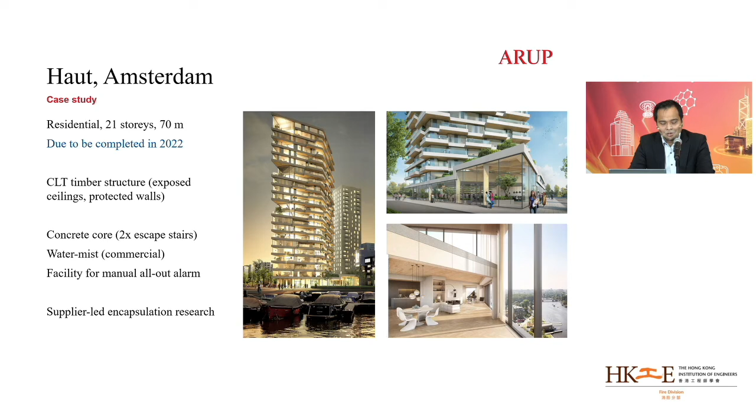in the last 10 years, from 2013 to these days, the tallest timber building has been increasing over the years, starting from a 32-meter building in Melbourne in 2013, and in 2019 or 2020, we already see timber buildings completed in Norway and Vienna of heights up to 84, 85 meters. And if we project onwards, there's a timber structure currently being planned in Tokyo. In 2041, it can go up to about 350 meters.

So hopefully by now you can understand that the trend for timber outside Hong Kong is not going to stop. It's going to come as time goes by. So as fire engineers, we need to go back to the fundamentals of timber behavior in fire. What are the problems? What are the issues? So let's look at the fundamental behavior of timber in fire, some fire dynamics and so on. We'll take you through some of the key considerations.

So timber burns, basically. It's combustible. There's nothing we can do to make timber become non-combustible. So for untreated timber, if you use it for decorations, as external cladding or internal decorations, fire can start and spread quite quickly on the surface. The problem is that when you use timber as an external facade and fire spreads quickly on the surface, the fire can spread from one floor to another.

And we heard the fire officer talk about how bad fire spread was in his presentation earlier. A lot of fires become detrimental because of the fast fire spread. So if timbers are not treated, fire can spread quite quickly. But luckily, there are treatments that can be made to timber to make the fire spread slower.

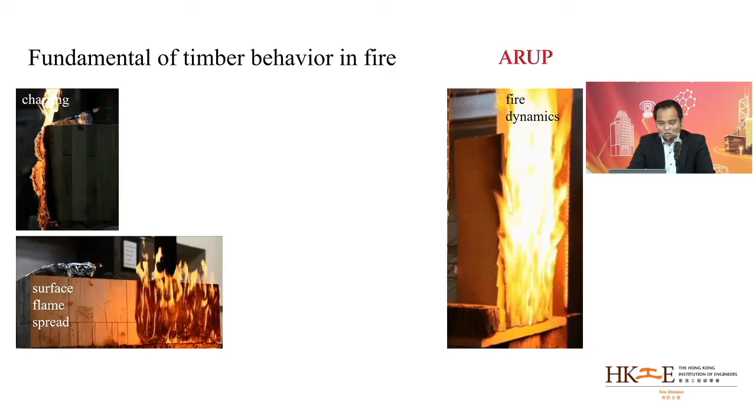But apart from that, when timber burns, it also forms a layer of charring. And then this layer of charring acts as an insulation to the unburned timber underneath it. So this charring is beneficial because, by acting as an insulation, it slows down the burning and the progression of char underneath.

So beyond charring, you have the layer underneath the char, which is heated but not charred yet. This layer of timber will lose its property or its ability to take loading. So when it's very hot, this layer of hot timber, which is not charred, will lose its strength quite completely.

And then finally, when you're adding all these decoration structures, everything together, we are actually adding more fire load to the building. Basically, timber will sustain burning. And by having all these timber materials in the compartment fire, the fire will last longer. So these are the fundamental behaviors we have to face as a fire engineer on timber fire.

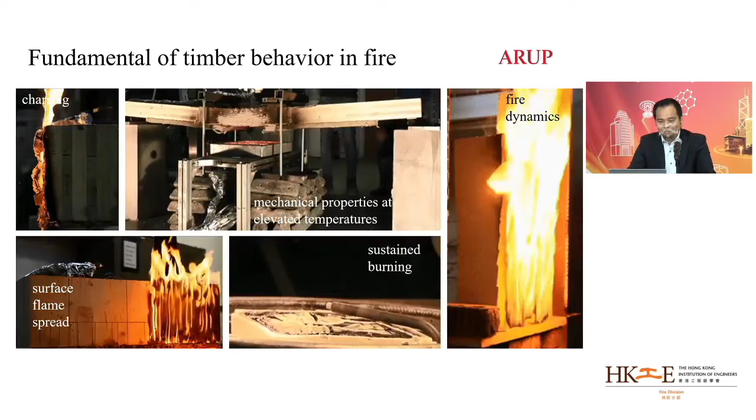So as I said earlier, timber is combustible. We cannot treat timber to achieve non-combustible, such as achieving BS 476 Part 4, but we can slow down the surface spread of flame using fire retardants or impregnations so that it achieves BS 476 Part 6 or Part 7, which is the common requirement in Hong Kong.

And when timber burns, we will have to use the char layer for our structures. So timber structural elements are designed by specifying sufficient section sizes so that the remaining timber that is not charred and has not lost strength is able to accommodate the relevant loading.

So this is a good picture showing mass timber. You have a char layer, and then you have a zero strength layer, and then beneath the zero strength layer, this is the remaining unaffected timber, where we, as structural engineers, will use this layer to take loading, or design this layer to take loading, and that's how structural use of timber is designed in fire.

And similar to steel or concrete beams or columns, we do conduct fire testing to verify the performance of timber in fire. Especially, there are many suppliers that carry out general tests for their products for different fire ratings. And we also heard Dr. Lippman talk about testing earlier. So if you want to use timber, testing will be a big part of it.

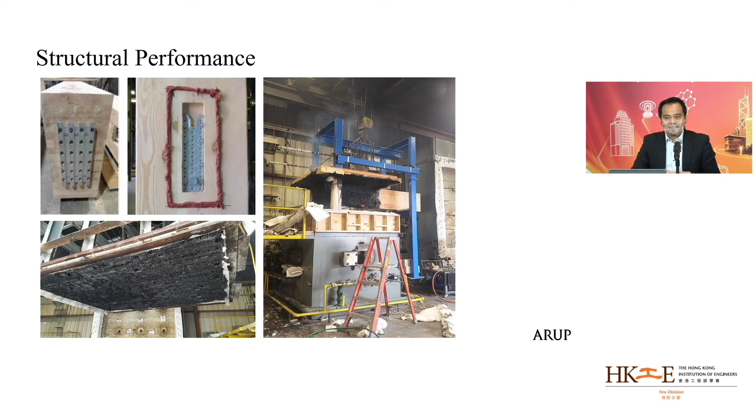Not just the beams and columns, but also the connections. Connections are actually very critical for timber buildings, and so a large range of timber types are being tested in test labs. So if you move on to mass timber, it is even more complicated.

The reason is that typically when we consider a fire in a fire compartment, we do not assume a lot of wood or timber to burn. So when we are using mass timber, we are actually adding more fire load to the fire compartment. Sorry, yeah, previous slides. So the temperatures in the fire compartment will actually increase.

In some of the experiments for CLT, you can see that they are reheating, or the fire actually dies down and then goes back up again towards the end, because when the charring on the surface falls off, more timber is exposed, and it adds fuel to the fire.

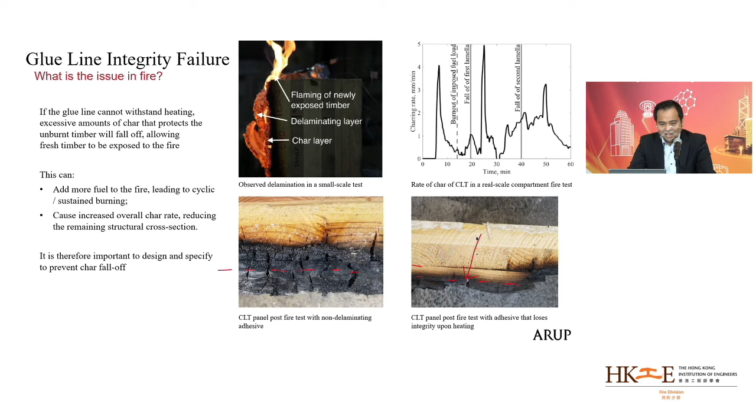So this is again, so in order to prevent all this happening, we need to fire protect the timber structures, and this is the fire test. On the left is actually showing where the fire protection failed. You can see that even towards the end of the test, more flames are coming out because the timber is adding to the fuel.

But if we are able to protect the timber structures with complete encapsulation, which is the fire protection, then the fire will be shielded from the timber and provide fire protection effectiveness to the timber structures.

Right. I'm going to lastly jump to regulations and code quickly. I know I haven't got much time. So Hong Kong, I think we are all very familiar with the approval process and so on. So in short, the current Hong Kong code and regulations actually do not allow combustible material or timber to be used in external wall, curtain wall, cladding, or roof.

And then for elements of construction, there's actually no restriction for timber, apart from asking for the timber to achieve a fire resisting rating. But there's no requirement and there's actually no guidance on mass timber construction either.

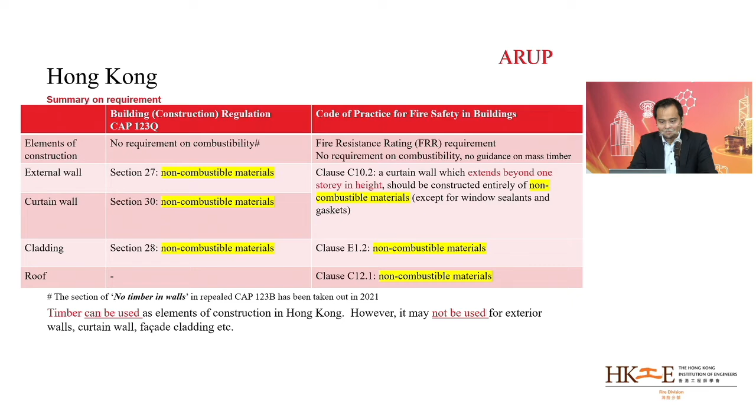Outside Hong Kong, in the UK, because of the Grenfell fire we heard about from Officer Chiu earlier, the regulations in the UK are changing. They are having more stringent restrictions on material for external walls, especially for buildings over 18 meters. But for the structures in the UK, the situation is similar to Hong Kong. There's no limitation, and there's a lack of guidance on mass timber in fire.

IBC in the US: for external cladding, combustible materials are not allowed, and if we are using combustible material, you have to do testing according to NFPA 285. And you have to test the entire cladding as a system in order for the combustible material to be used as external cladding.

For structures, the codes are being updated, and IBC 2021 actually makes a lot of relaxations for timber. So previously, timber was only allowed up to 6 stories with a maximum of 85 feet and a certain area. But in the 2021 IBC, there are 3 types of construction. You can do it to type 4C, 4B, and 4A.

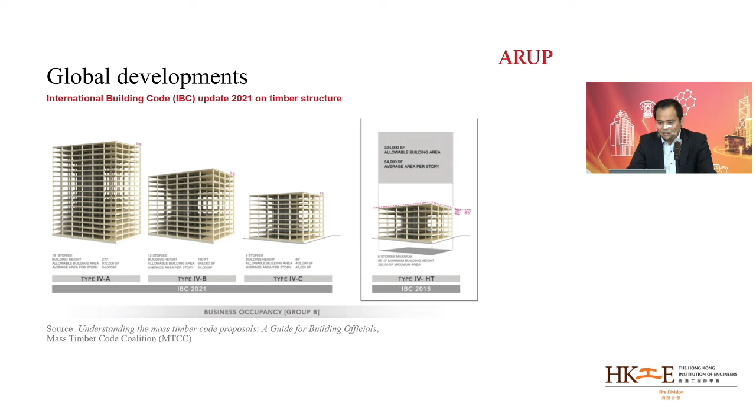Again, in Singapore, they have changed their regulations and codes. In 2014, the Singapore Civil Defence issued a circular to allow the use of CLT. And then in 2016, they amended the Singapore Fire Code to allow engineered timber like glulam and CLT. But of course, there are lots of requirements together, especially for buildings over 12 meters. A performance-based approach has to be used.

China, similarly, we are seeing relaxations in the new fire code released in 2015. There are new chapters allowing hybrid timber buildings to be built up to 7 floors or 24 meters.

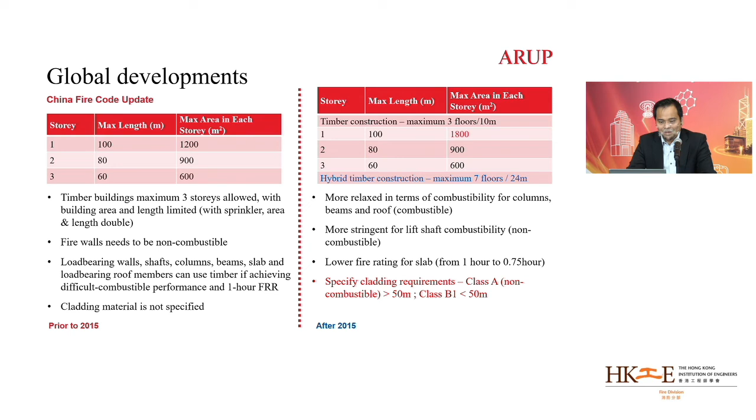So basically, globally, we can see that outside Hong Kong, the codes are changing. The requirements for external facades or cladding for combustible materials are becoming stricter and stricter, I think mainly because of the fire in Grenfell.

But for structures, mass timber is becoming more and more popular, and codes are being refreshed, reviewed and released to allow mass timber to be used for taller and larger buildings. Of course, the fire protection measures, sprinklers, and so on requirements will also be upgraded in all these new allowances.

So finally, we as Arup know that there's a big knowledge gap in timber in fire. So we actually carry out a lot of research internally and also externally. We are currently collaborating with external parties, including Imperial College, CERIB, the test lab in France, and also the University of Edinburgh to carry out different research, mainly on mass timber.

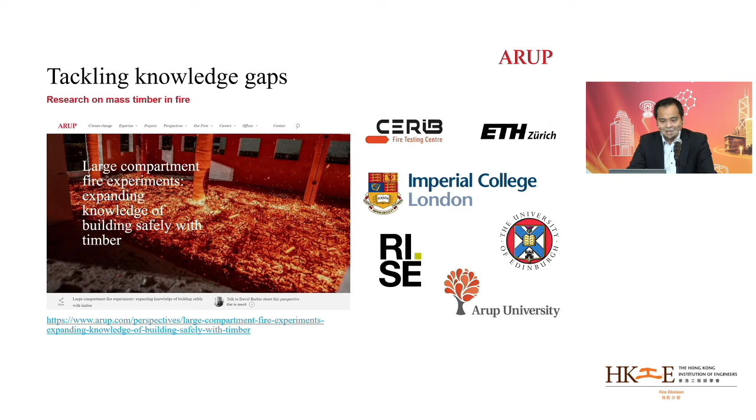And also, as fire engineers, we think that timber is actually very important because of the sustainable development requirements. As fire engineers, we have to consider timber, although we have to recognize that timber introduces additional hazards, so we have to address them, and we have to consider the full range of issues from evacuation to fire spread, to external fire spread, structures, and finally how the timber structures can support firefighting and rescue operations.

So all these fire safety issues have to be addressed when timbers are introduced into buildings, and ideally a fire strategy covering all this area is required. So this is my last slide. So as a summary,

from the beginning, I talked about timber as a key contributor to net zero because of sustainable development goals and the drive to reduce carbon footprint or carbon emission. We have to consider timber. As an industry, we have no choice. There's a global push for timber as a construction material, especially for mass timber structures.

And over the last 5 to 10 years, we are seeing more and more research and study. So we are gaining more confidence and capacity to address some of the challenges presented by timber. We need industry-wide collaboration. We need our authority to understand, to play a role. We need the testing industry to help do a lot of tests. We need universities to do the research together, and as fire engineers, we also play a part.

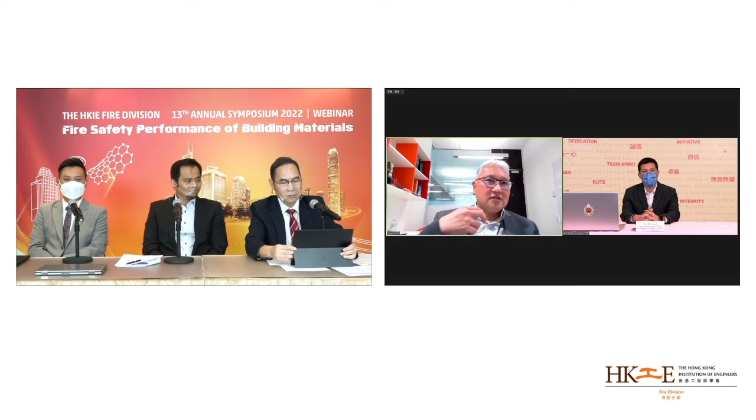Because it's a metal and has a lot of good properties, we have found that the MXene, which is 2D nanosheets, if you can lay it in a systematic manner, actually forms a barrier. Now, to make the barrier, you need a glue, and the glue part is the chitosan. Chitosan is essentially an extract from prawn shell. You mix the solution with the MXene, and the MXene will interlock with each other to form a coating.

And that coating is so effective: the MXene itself helps to disperse the heat, while the chitosan holds the materials together to shield it from the external heat as well. That's how both of these materials work. And through testing, the flammability actually reduces by up to 80%. It's just amazing. And the coating we apply on any polymer substrate is roughly 0.5 millimeter thick.

That's it. That's about it. So that's where the lightweight comes in, you can call it the ultra lightweight, if you want to consider it that way. So basically the coating itself, at such small thickness, super thin thickness, allows the shielding to be quite effective. That's basically what the presentation is all about.

Thank you. Next, can you summarize again the performance of the new product or the technology? And how far do you think you have achieved your objectives? Okay, so let me answer this in two parts. This is a very interesting question. In summary, what we have done is that we have managed to prove that these materials work, and also the hybrid combination of inorganic and organic seems to be a pathway for upscaling.

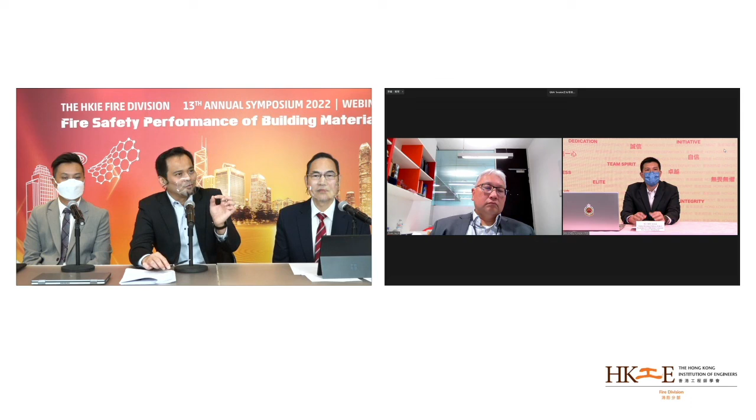Yep, thank you, Professor. Yes, of course, fire protection can be added on the surface of timber. Metal sheet may still conduct a lot of heat, so perhaps behind the metal sheet you'd need another layer of rock wool or something to provide insulation, then that's possible. Or you can simply use plasterboard to encapsulate the surface of the timber so that the timber structure is not affected by heat.

So that is actually the first solution that we can provide to protect timber structures. Yeah. So is it possible? Yes, okay, definitely. Thank you.